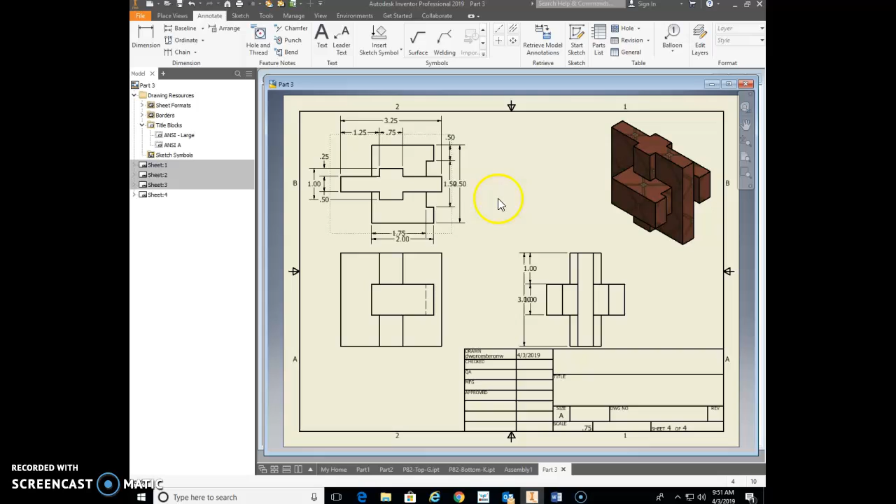Alright, so next, a couple little tidbits on this drawing. So, got them all placed there into place. Again, it's a very tight fit here. I could maybe slide this one down just a tiny bit to give me a little bit of space on the top border. But notice here, for example, if you didn't fix this, this is something you need to fix. Whoop, zoomed the wrong way. I always zoom backwards on Inventor.

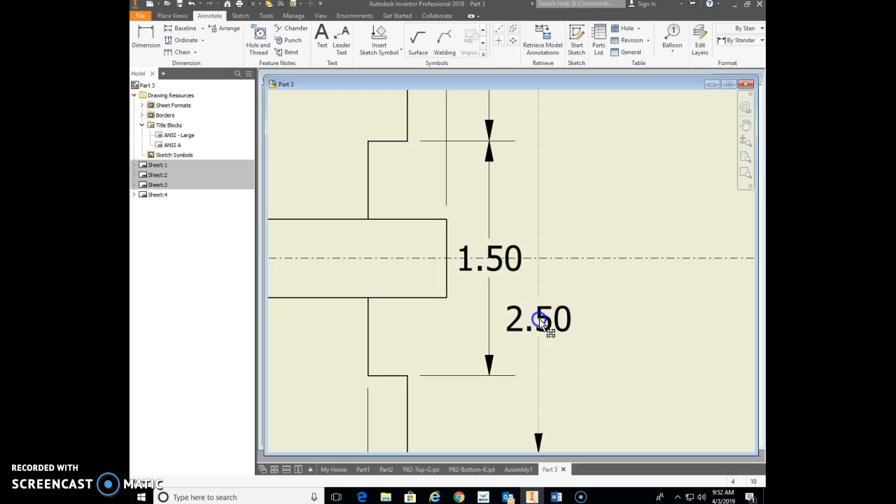So here, how are those 1.5 and 2.5 dimensions? How easy are those to read? Yeah, not very easy at all. What you need to do is hit escape. And when you get the little four-way arrow, when you hover over a number, just separate those out a little bit. So this one, keep it on the dashed line there. Don't pull it out to here. Keep it on that locked-in dashed line, but pull the number itself down a little bit. So those are just staggered a little bit. And that makes it very readable, and you can see that very easily.

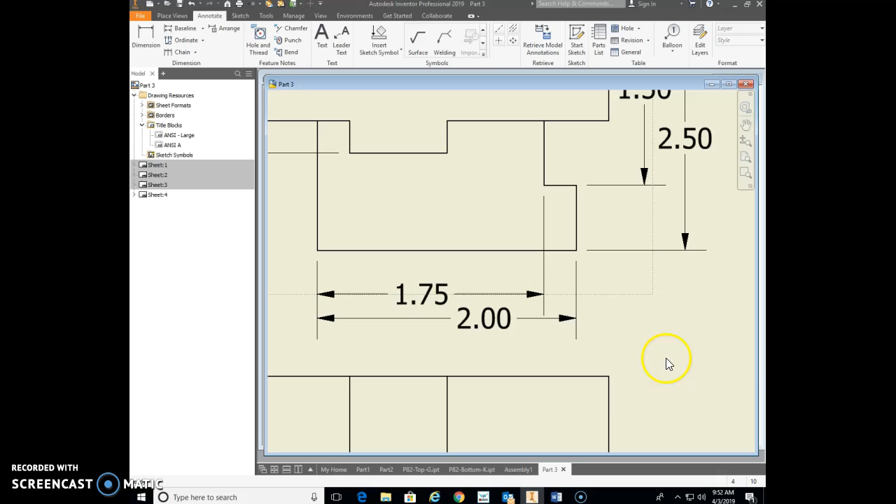Kind of the same thing here on this one, this 2-inch, you can pull it over a little bit that way. The 1.75, again, keep it locked in, pull it over that way. And that's just much better like that. Just go around your whole drawing and kind of look at it like that and see if you have any that are stacked on top of each other. I know you do right over here, probably, if you didn't modify it.

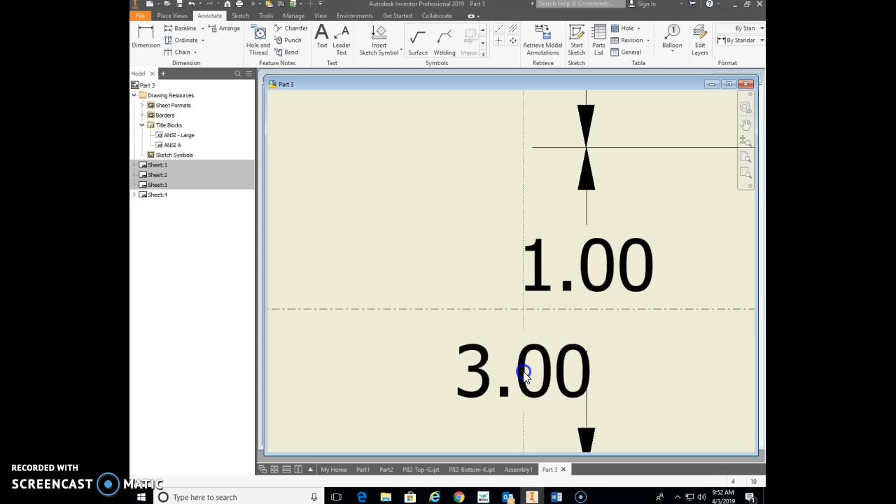So again, pull one up, maybe a little bit. Oop, keep it side to side there. Pull one up a little bit. Pull one down maybe a little bit. And that is much, much better. And you can actually read what it says. All right, so fix that all the way through in all your drawings. But you should have a nice little packet here of all these pages.

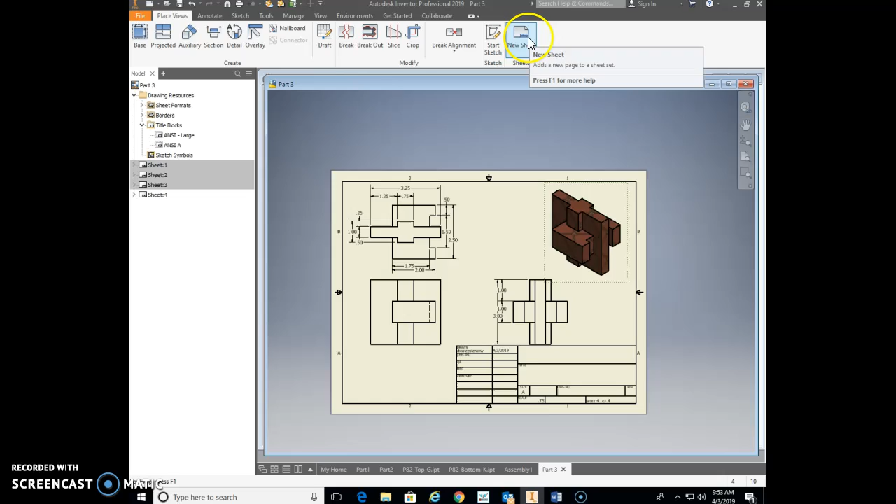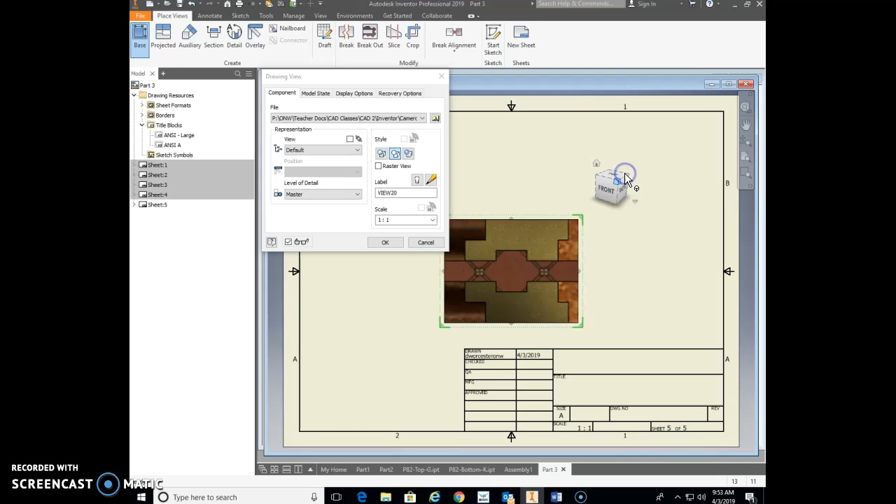We're going to add in one more page to this, so let's go ahead and add one more new sheet. So go new sheet again. This one is going to be like our first page of the handout, and we're going to create that. So the first thing you're going to do is go up to base, and this time you're going to pick your assembly. So we're going to put in our assembly. And our assembly doesn't go like that. We're going to try to put it like that one in the top right corner. So you can click on the corners of these cubes. So I'm going to click right there on that corner. And that has it there in that orientation.

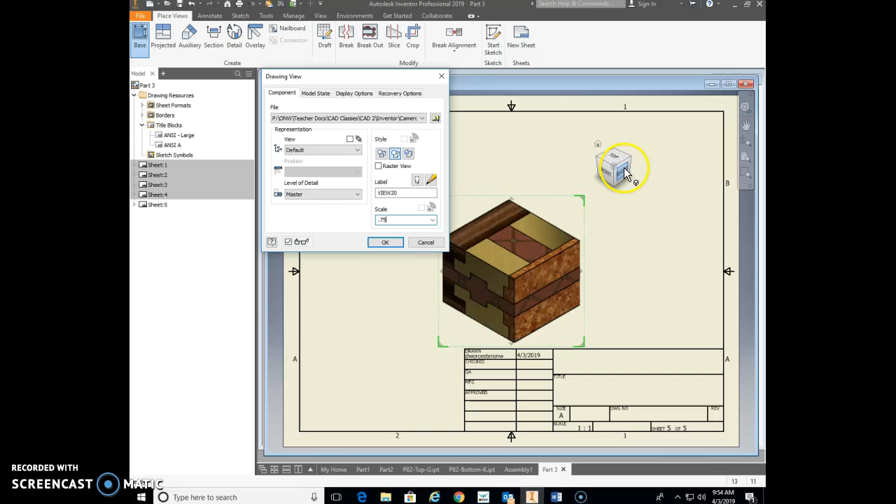Now, the 1:1 scale I think is a little bit small. So I think I'm going to try this one at 0.75. And I think that looks a little bit better. I'm just going to place that one right there. So again, have it in the right orientation, so that this L-shaped block is pointing out towards you. And here, it might take some rotating around on your cube to do that. So we're going to go OK, and put that one in there. All right, so get that one there, and we'll go on here in just a moment.

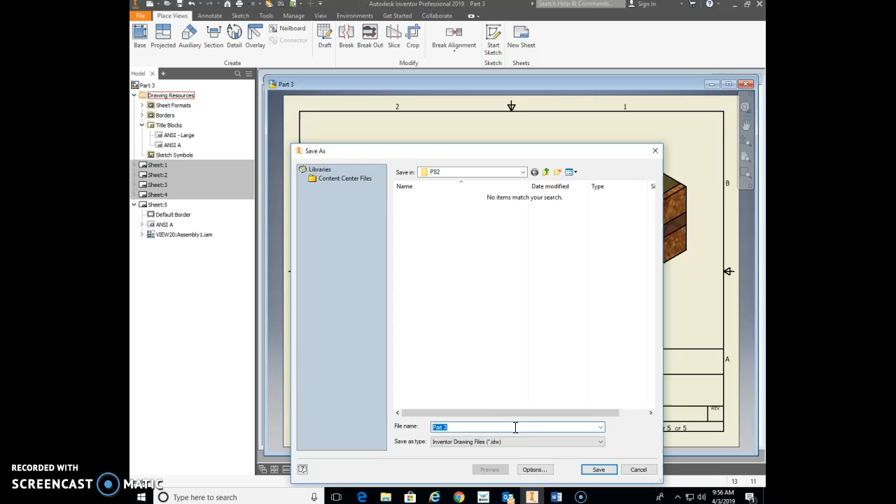So we're going to go ahead and save this one here. So let's go ahead and save it. Go save. It's going to be an IDW extension on this. So you're just going to name this Cameron Block. Save it to your right folder, not your P82 folder. That's where mine's set there. Don't want to save it there. And honestly, I don't want to save mine. But change to your Cameron Block folder and just save this as Cameron Block. And it's going to have the extension of an IDW there. And that's going to be great.

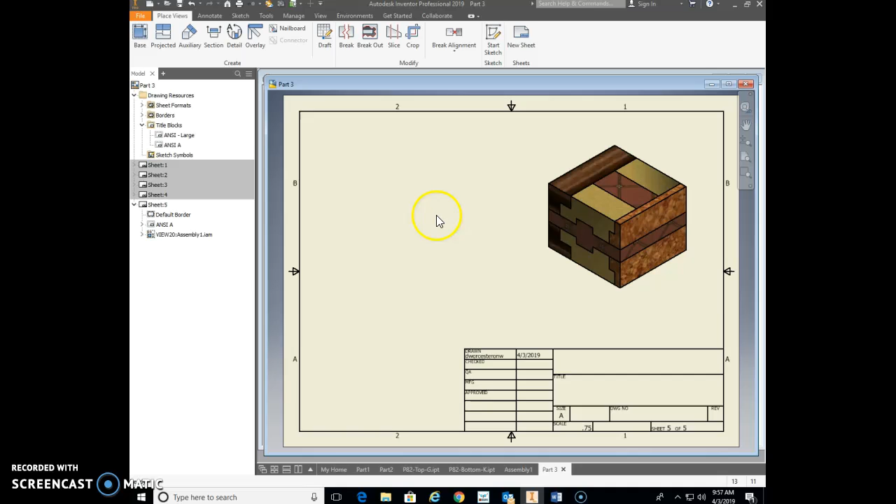Okay. Then what we're going to do is start a new drawing. So go File and New. What do you think? What are we going to create? Well, one we haven't created yet. We're going to create an IPN, which is an animation. So go ahead and click on Standard IPN.

When you click on this, when it first comes up, it makes you pick what you want to do. We want to pick the assembly to make an IPN, an animation of. So we're going to pick the assembly and go Open. And it just starts you right here on the screen.

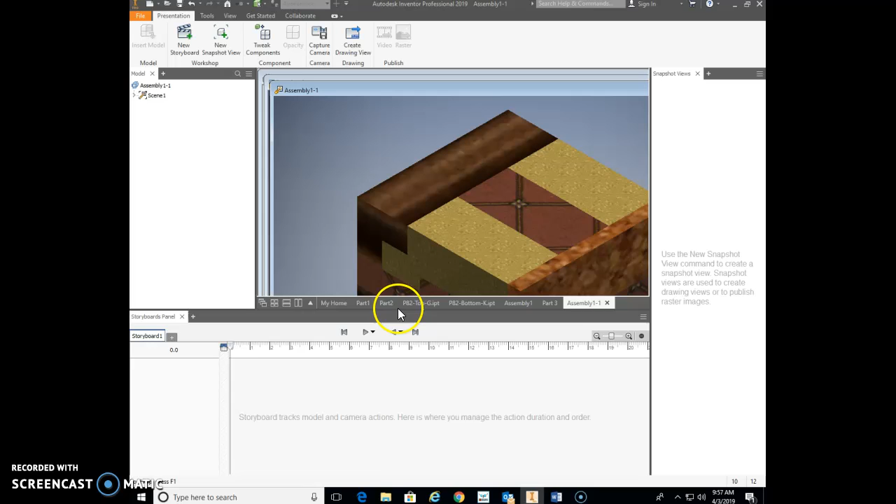Yours will look a little bit differently than mine, so let me pull mine down, make it look a little bit more like yours. There we go. I don't know what I've got over here on the side. I'm going to get rid of that screen for right now. And there we go.

All right. This has changed a lot over the years. Last year they changed this hugely. All this extra stuff down here below is new. But this is your animation. The first thing we're going to do, insert model's already been done. We already took care of that. So now we're actually going to come over here a little ways, and we're going to start tweaking components. So we're going to click on this button that says Tweak Components.

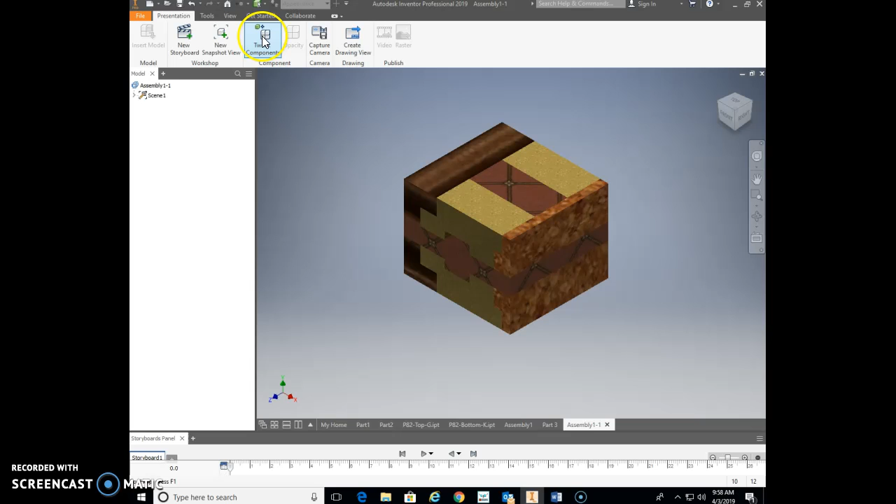I'm going to try to make it just like my handout for right now. And I'm going to pick this part here and click on it. And it gives me a little three-way arrow. It gives me a direction of my X, my Y, and my Z there. I want to move this, and your arrow may be pointing out. Mine's pointing in. That was under Tweak Components up here at the top.

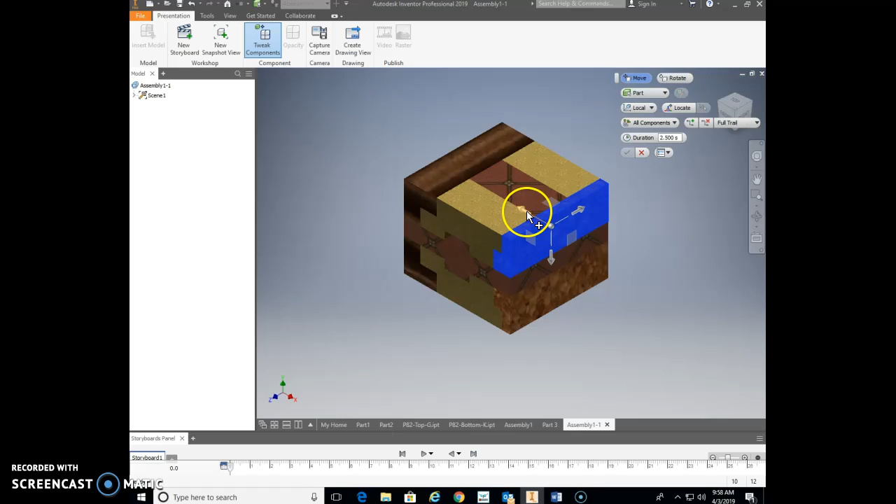I want my part to move out. So I want to move in this direction. So I'm going to click on it. But if I type a positive number, it's going to be moving further into it, the way the direction of the arrow is pointing. So for mine, I need to go a negative number. Yours, depending on which way your arrow is pointing, you may need to go negative or positive. You're going to have to determine that.

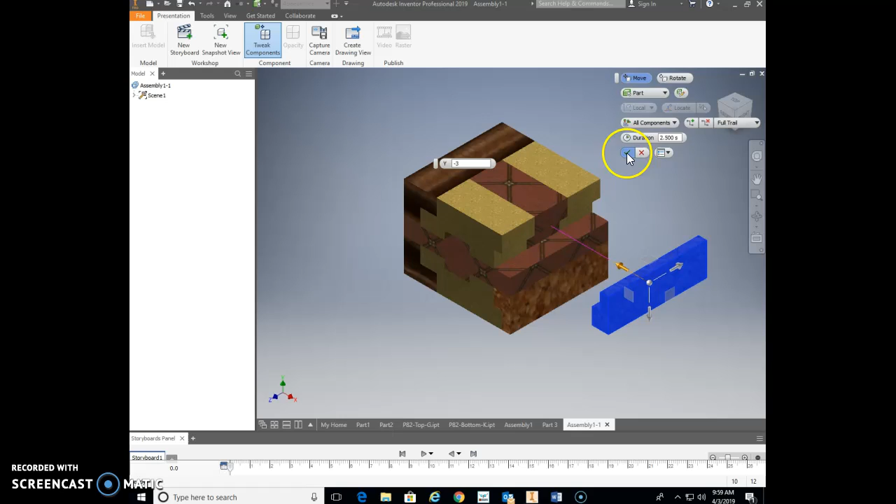So on mine, I want to go a negative maybe 3. So I'm going to go -3, and notice it moves that block out. I'm going to hit my little check mark and accept that. Okay, so there's my first tweak, moving out 3 units.

What? Am I not recording?

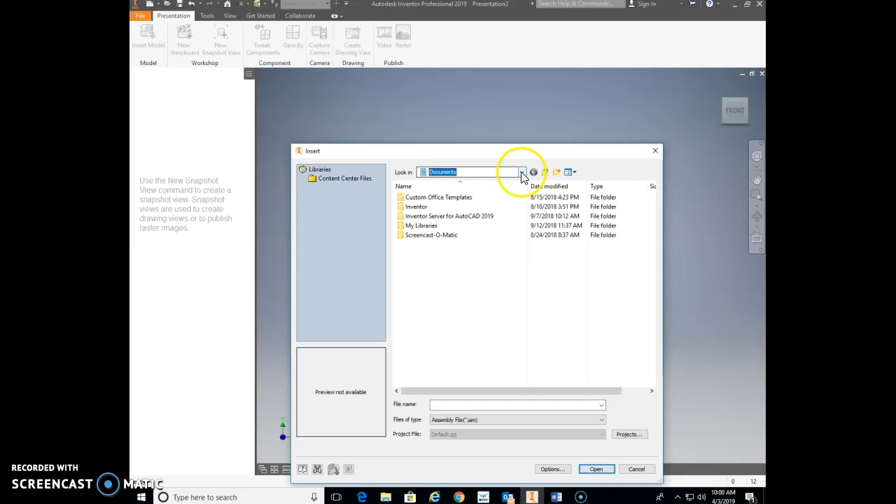All right, so I'm going to go ahead and start our new type of drawing. Go to File, and New. We're going to do a standard IPN. With that, it comes up first off and makes you pick a drawing. So you have to pick your camera block assembly. So I'm going to go in here and try to find my camera block assembly. Why it took me to here, I don't know.

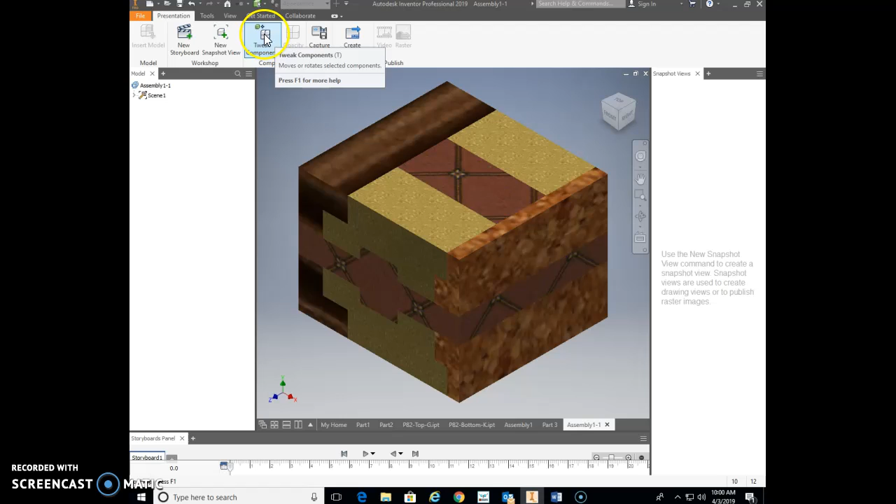I'm going to go to my P drive and go find my drawing. It's buried in here. Alright, there. Going to pick my assembly and it plops that in. Then, next, what I'm going to do is I'm going to go up here and go to Tweak Components. I'm going to click on this block of my object, and I'm going to tweak it.

I want it to come straight out, so the arrow is pointing in. I'm going to put on that arrow, that's the direction I want it to move. But if I type a positive number, it's going to move in. I want to go out negative, so I'm going to go out a -3. And I'll zoom out here a little bit, and I'll hit my check mark, and that's okay for my first step.

Alright, from here, hopefully you didn't miss that last step. Hopefully I recorded. My recording is kind of messing up there for you. I'm sorry. If it did, just go back a step from here.

Alright, so we're going to go next to Tweak Components. Again, we're going to tweak again. I'm going to tweak that same component once again. I'm going to click there on it. I'm going to move it in this direction this time. And again, this time it's going in the direction of my arrow for me. So I want to move it that way, and I'm going to move it, say, 2 units that way. So 2, and it slides over, and hit my little check mark, and go OK.

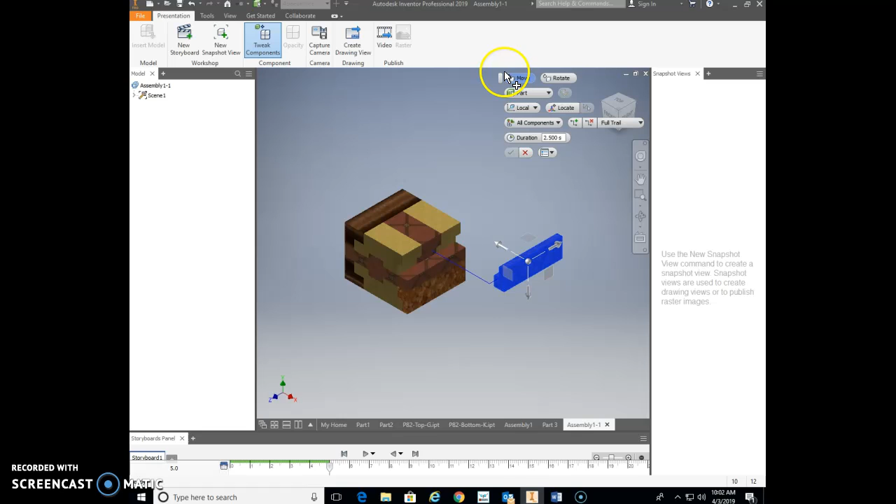Once again, I'm going to go ahead and tweak that component again. I'm going to select it. This time, instead of Move, which I'm selected on up here, I'm going to go to Rotate. So we'll click on Rotate this time.

And are we going to have an announcement?

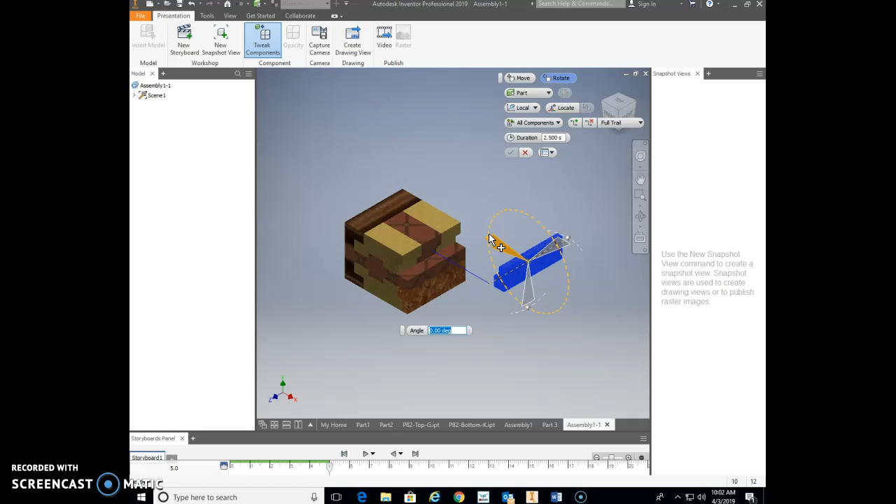Maybe not. And rotate, notice you have these 3 different directions you can rotate. I can rotate it here around this axis, spin it this direction, or spin it this direction. I want to rotate it in this axis here, so I'm going to click on it. When you do, it gives me the angle I want to rotate it. I just want to rotate it 90 degrees. So I'm going to type in 90, and hit my check mark.

And now I'm going to go ahead and just try to play through that and see what I've got. So I'm going to come down here below and click on the little play button, and I'm going to play it. So it shows me what I've got there. That slides out, slides over, and then twists 90 degrees. Now, it goes pretty slow there. So this is where we're going to start modifying this a little bit.

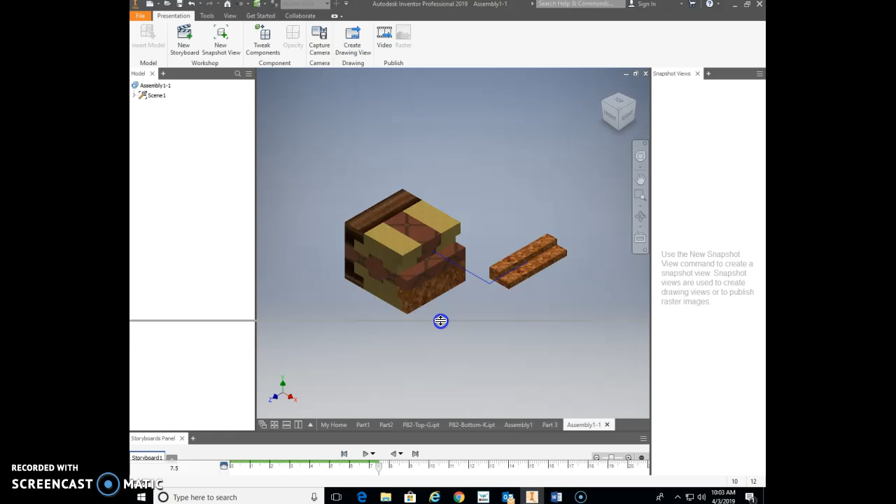So we're going to pull this up a little bit so I see some more details down here. I see my part 3-2 here. I'm going to hit the little arrow to open it up. And now I see each one of these individual things. If I hover over top of this first section, notice that first little line lights up. If I hover over top of this one, the next line lights up. If I hover over top of this one, the whole part lights up, and that's the rotate. It says rotate there. Right now, this first one's taking 2.5 seconds.

I'm going to adjust that time down. Yeah, there we go. I'm going to adjust that time down, and then I'm going to slide this one over to there. And now, let me play that again. It goes really quickly, that first part, then it slides over slow. So that first part took a 1/2 second to do, and it still took 2.5 seconds for the next part.

So again, I can adjust this one down, pull this one in, and play again. See, slides out quick, slides over quick, and it rotates really slow. Again, I can adjust that rotation down so it's quick also. And here, it's going to be totally high-tech. Notice this. I can grab this whole thing, I can slide it, I can do it at the same time as the other one. So now it's going to move there and rotate there all at the same time.

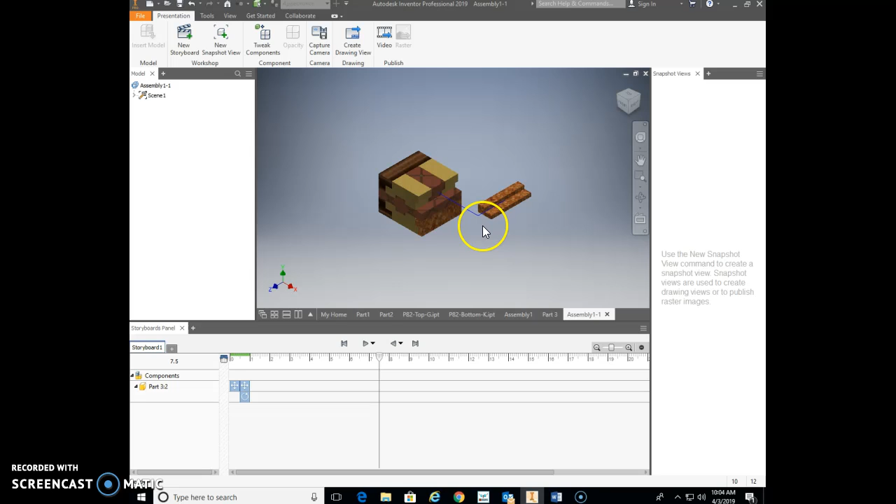Let's try this out and see. Slide out and spin, and it's a spin, rotate, move all at the same time. You can just play with this, do all kinds of different things with this. What I want you to do, instead of making it really simple like the handout, I want you to make some more complex moves. Be creative, do some different stuff. The main thing is I don't want you to break the laws of physics.

And what I mean by that is don't move this part through the entire block and make it intersect through other pieces. Things cannot run into each other. You have to make them go around in different places and different positions. But rotate, twist, do all those fun things to it. Move them in several directions. Big part of it is don't move it much more than about 3 inches at a time.

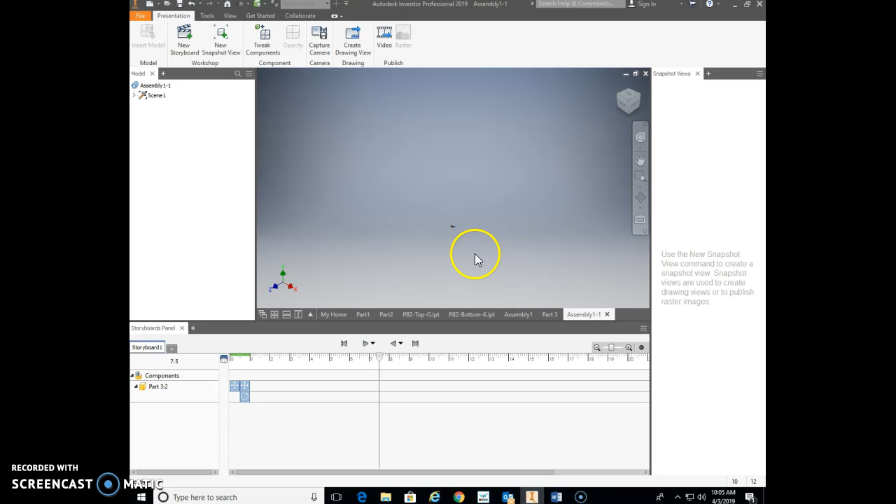I don't want this whole thing where I have to be zoomed out to here because you moved it 697 units. I can't see that. I can't see what it's doing. I'm not going to chase it around the screen. And then the last tidbit is your entire thing, I don't want it to be more than 10 seconds. Because again, if I have a 6-minute long video, I don't want to sit and watch your thing play for 6 minutes when I grade it. 10 seconds, I can see, yep, looks good, looks cool, and I can see what I need to.

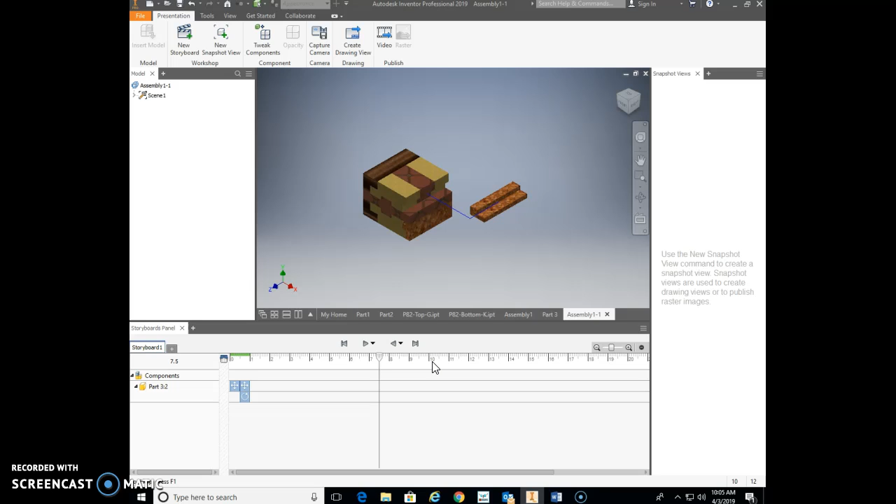There we go. Carry on, see what you have, and I don't know if my video is recording or not, but we'll see what you got. All right, make things happen. What?